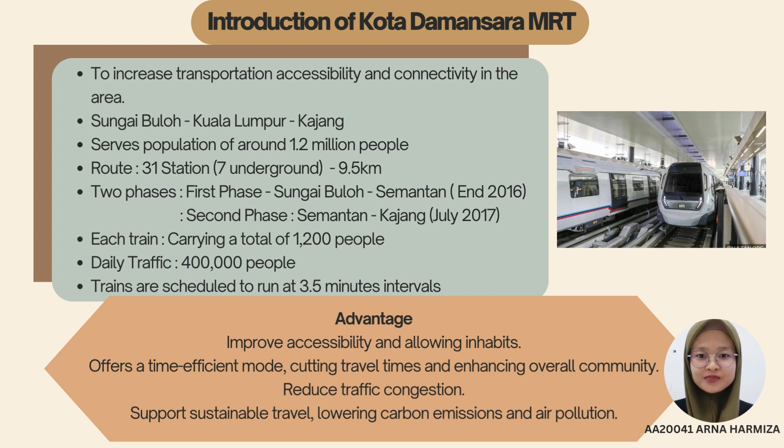For introduction, the Kota Damansara MRT function is to increase transportation accessibility and connectivity in the area, which is from Sungai Buloh to Kuala Lumpur and ends in Kajang. Each train carries a total of 1,200 people and there are 31 stations. Daily traffic is 400,000 people with a 3.5-minute interval for each train.

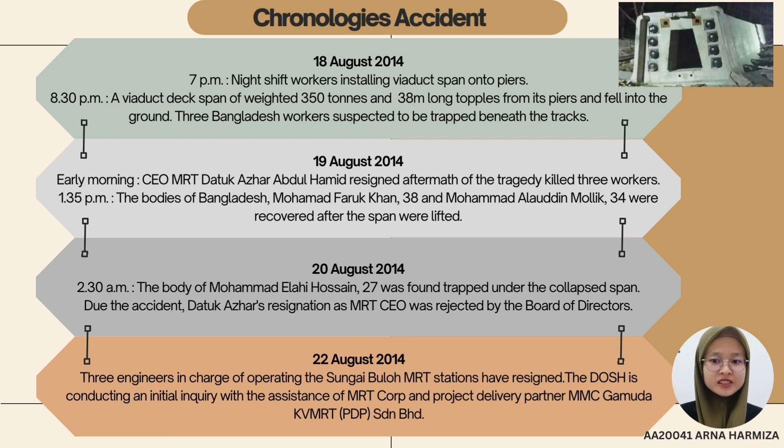This Kota Damansara MRT had an incident. It happened because a viaduct span weighing 350 tons and 38 meters long toppled from its piers and fell to the ground. It caused 3 Bangladeshis to die in this tragedy.

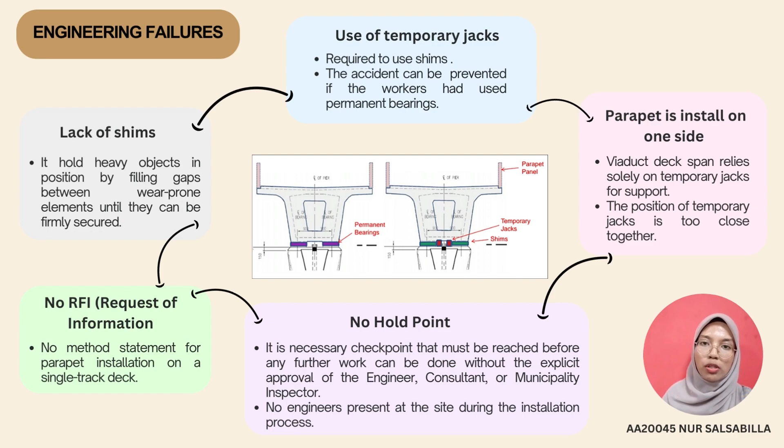For the next part, why this situation may happen: it is clear that an ethical issue happened in this construction. The lack of discipline in the construction industry can give rise to several significant ethical issues. It affects various aspects of construction projects and undermines the overall integrity and professionalism of the industry. One of the main ethical issues resulting from a lack of discipline is poor workmanship. Without discipline, construction professionals may cut corners, neglect the necessary steps, or fail to follow established industry best practice.

Companies can address this ethical issue of lack of discipline through strong leadership, training programs, and strict adherence to established processes and procedures. Next is the lack of work guidelines. It can clearly impact the overall integrity and efficiency of a construction project. In the absence of work guidelines, there may be inconsistencies in the quality of work performed. However, we can address this issue by taking proactive measures. Comprehensive and well-defined work guidelines should be developed and provided.

I will explain how lack of professionalism may lead to this MRT mishap. From the case of failure, we can try to relate it to a lack of professionalism. For example, installing the viaduct without permanent bearings as supporters is one cause of failure. For this failure, we can relate it to a lack of professionalism in terms of complying with proper construction practices and safety protocols. Another cause of failure is lack of shim support to keep the viaduct stable and secure. For this failure, we can relate it to a lack of professionalism in assuring the adoption of acceptable procedures.

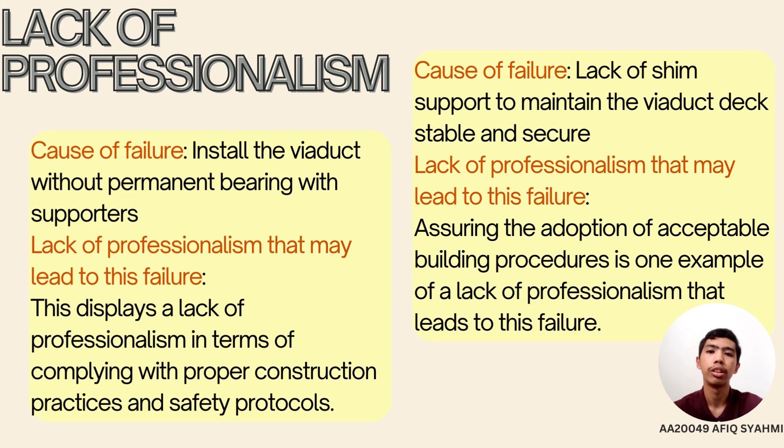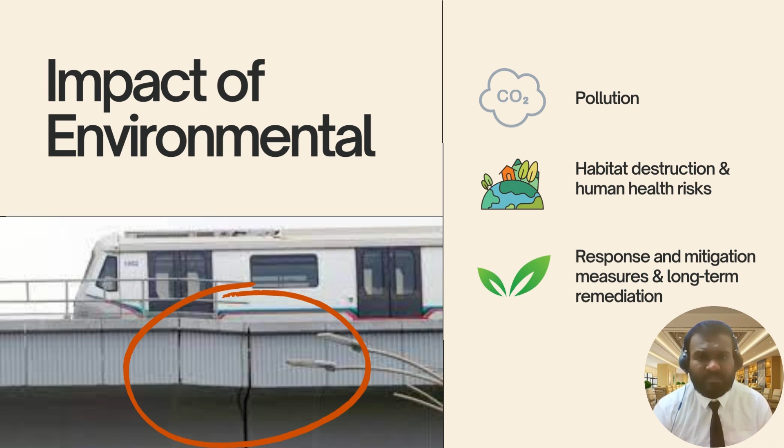Another is long-term environmental remediation, which is soil and water cleanup and habitat restoration, with timeline, cost and coordination for successful remediation. From the failure, we found two main findings: the significant impact on the environment from the Kota Damansara MRT mishap, and the importance of continuous monitoring and remediation for ecosystem restoration and human health protection.

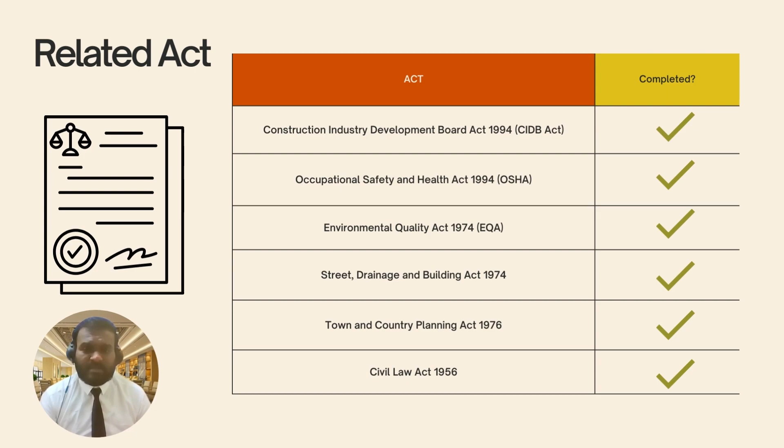For conclusion, many advantages can be gained with this MRT construction, but engineering failure can be avoided if all organizations have good communication and decision making. Safety is the main factor for every project that needs to be emphasized.